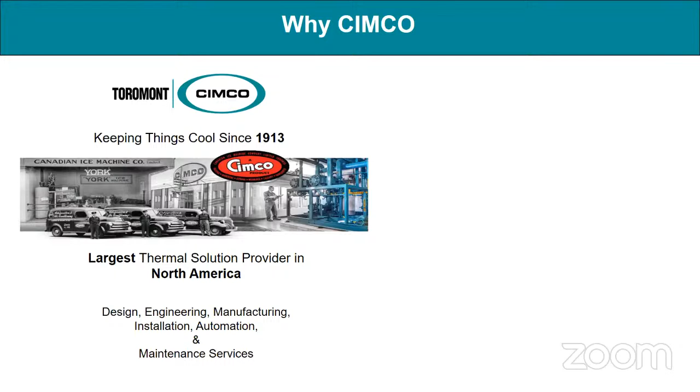So just a quick brief intro on CIMCO. We've actually been around since 1913 as the Canadian Ice Machine Company. So we know a thing or two about making things cool. And we are the largest thermal solution provider within North America. So we do design, engineering, manufacturing, installation, automation, as well as maintenance. And this is why in 2019 and 2020, we were actually asked to participate in the Mayor's Megawatt Challenge, which was a cohort project put on by Climate Challenge Network.

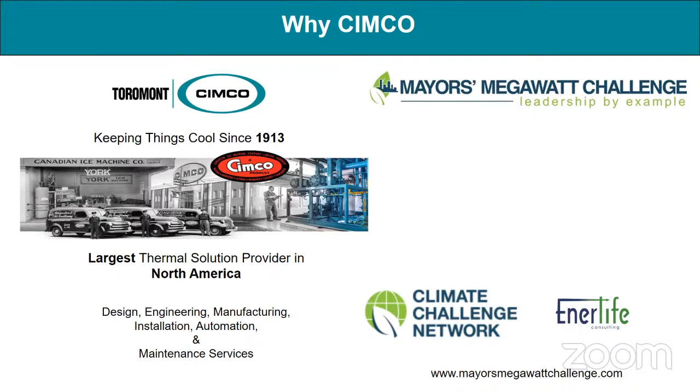And what this cohort project did was it looked at 9 municipal ice rinks and established a feasible pathway for them to lower their GHG emissions, and ultimately gave a high-level business plan that compares business as usual against these low carbon upgrades. So the way that the cohort project and the study was outlined is that we would first establish the emissions baseline. And this is looking at more than just the refrigeration plant. It's looking at the HVAC systems, the insulation, your R value within each building, and then establishing what can actually be done to reduce your GHG footprint, and along the pathway of when it should be done.

So not just an all-in-one solution. We want to look at what actually makes sense based on the end of life for a lot of these pieces of equipment. And then showing the financial analysis. So there's 3 financial analyses, and it would be business as usual, keeping things status quo, versus our low carbon measures, meeting the reduction targets that the government of Canada has put on, which is 50% GHG reduction by 2030 and an 80% GHG reduction by 2050. And then also, if we wanted to escalate this timeline, what could we do to meet that 80% reduction within 5 years? So we're actually preparing 3 business plans for each individual facility.

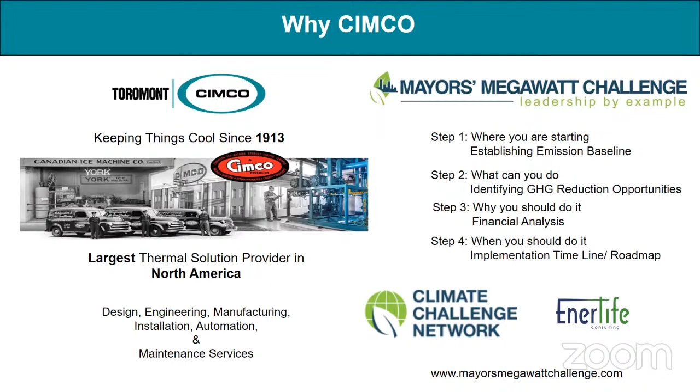And the reason that we are involved in this is because when it comes to a municipal breakdown, arenas and ice plants make up a large portion of the natural gas that is consumed along with the electricity. This here is just arenas in general, but we also know that multi-purpose buildings can most likely include an arena. So we know that they do take a big chunk of this pie, more or less.

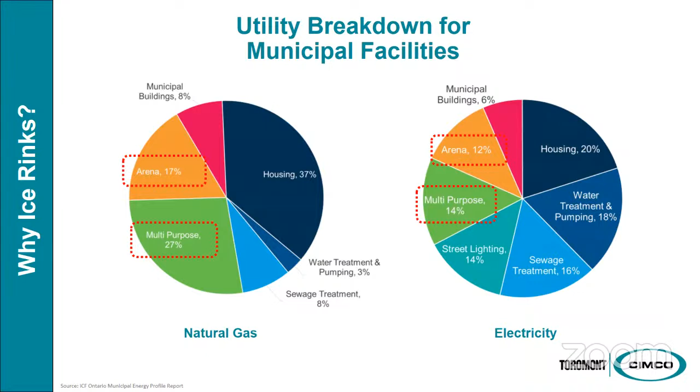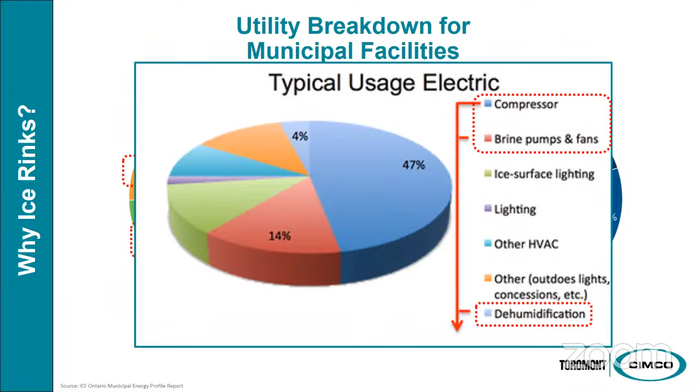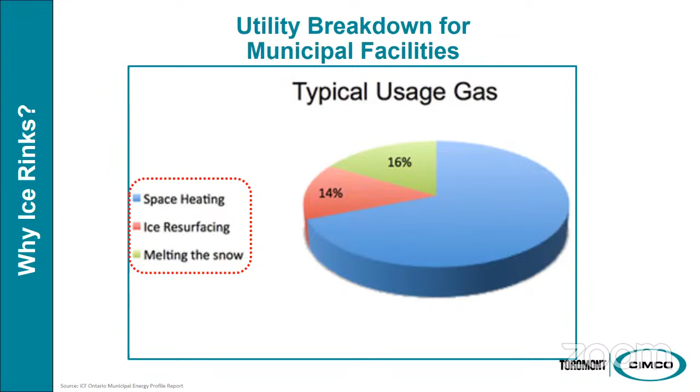And then if we break it down even further, most of the electrical usage within an arena goes to removing heat. We're running those compressors, we're running those brine pumps, we're running dehumidification, and all of that, in order to actually function, requires electricity. At the same time, while we're removing heat, we're also creating heat through a completely different system within that building. And typically we are using natural gas in order to actually create that heat. And a majority of natural gas usage within a municipal breakdown goes all towards the refrigeration plant and keeping people being able to actually use the facility.

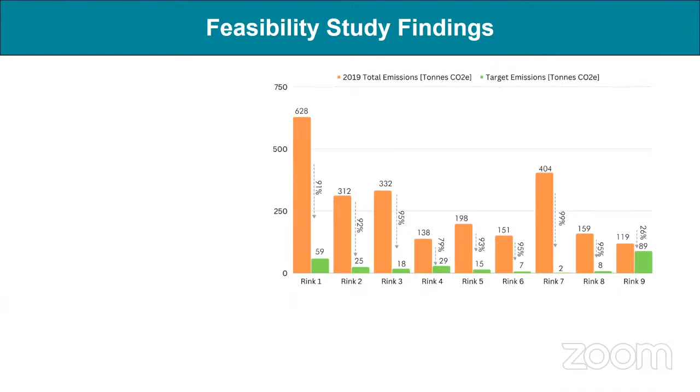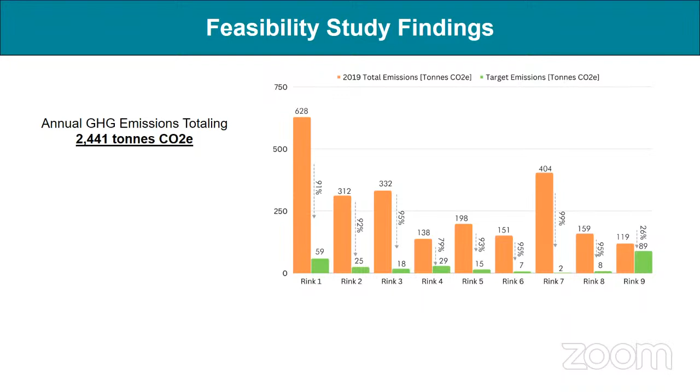So if we look at, these are the 9 rinks that were in the cohort project. So I'm just going to focus kind of overly on the results of this. Combined, these 9 arenas will have an annual GHG emissions totaling 2,441 tons of CO2 equivalent annually. By following the GHG reduction pathway that was outlined, we can actually get that down to 252 tons, which is a significant difference. On average, it was about an 88% reduction in GHG emissions.

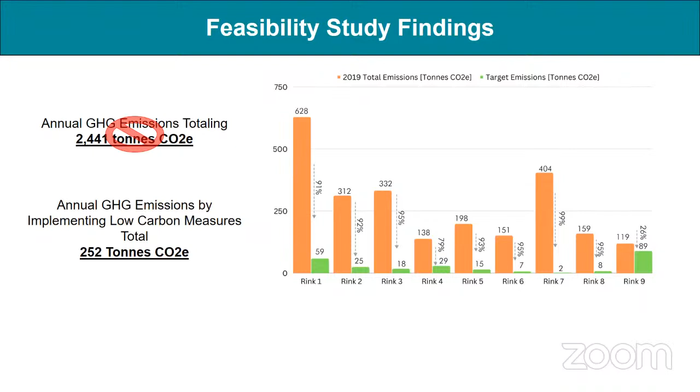The nice thing with that, though, is because we're looking at how we can offset, say, natural gas with electrification, we actually, on average, had a 35% reduction in utility costs. So annually, by following these plans, these 9 arenas will have a combined savings of over $1.3 million a year. When it comes to Canada alone, we have the largest number of arenas globally. I think we've got about 3,500 just arenas across Canada, and we're Canadian, so it's definitely a great place to start when we're talking about lowering our GHG emissions.

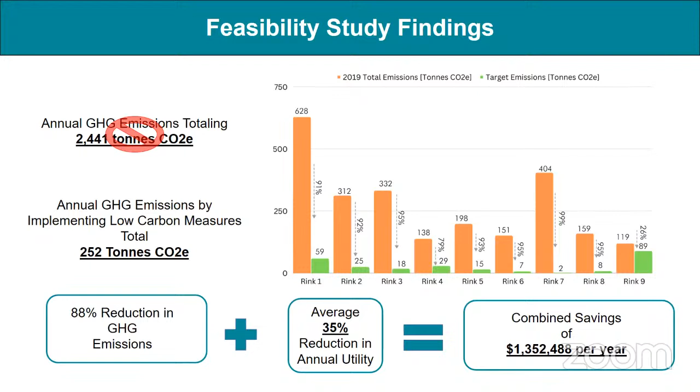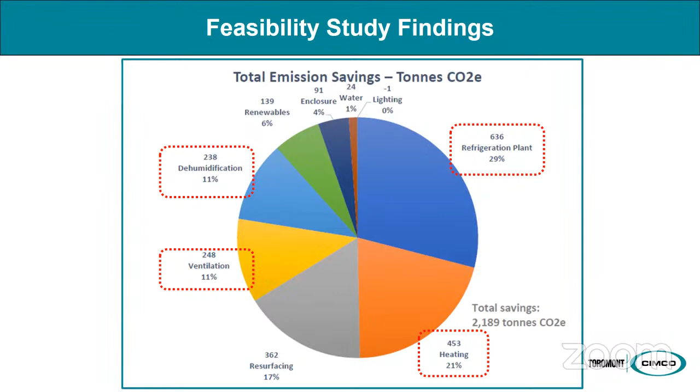Most of the emission savings comes from that refrigeration plant as well. We're looking, again, at dehumidification, ventilation, heating, and then making cold. The studies look at the 3 pillars that are needed to achieve net zero, and it's all going to be specified for your specific location. What actually makes sense for you guys? So starting with optimizing energy consumption, we also want to look at harnessing green power. And then one of the pillars that is often overlooked is eliminating refrigerant emissions.

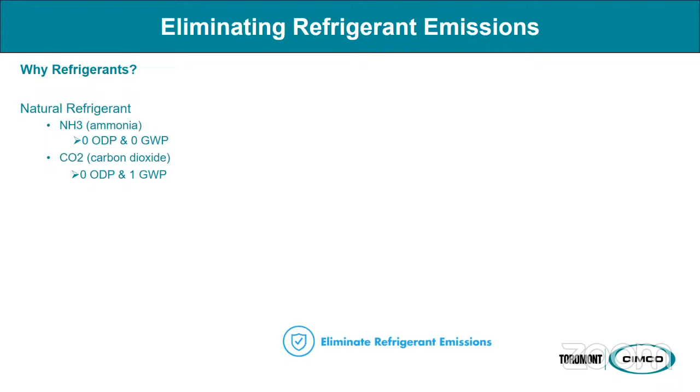So when we're talking about refrigerant emissions, and this is again why CIMCO has made commitments regarding synthetic refrigerants. We have 2 different types of refrigerants. We have natural refrigerants, which would be like CO2 or ammonia. And these are just chemical compounds that are found naturally within the universe. Ammonia has a 0 ODP, so that's ozone depletion potential, and 0 GWP, which is global warming potential. Whereas CO2 has 0 ODP and then a 1 global warming potential. So CO2 is essentially the baseline that we would compare all other refrigerants to. 1 pound of CO2 is equivalent to 1 pound of CO2 being released into the environment.

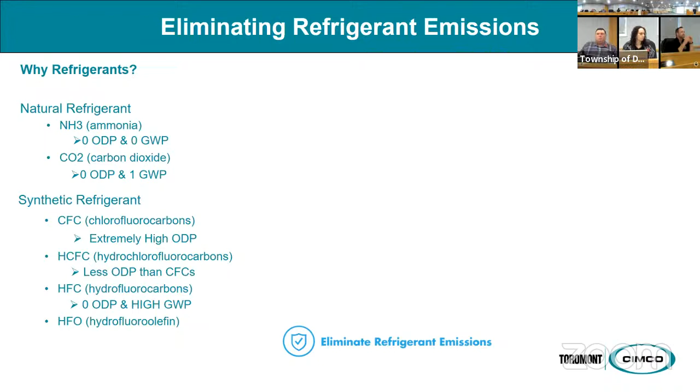Whereas when you're looking at synthetic refrigerants, there has been a big history when it comes to different types of synthetic CFCs, HCFCs, HFCs, and then HFOs. And these will vary depending on the type of chemical that's involved. So they're either going to have extremely high ODPs, which were then phased out through the Montreal Protocol, to newer HFCs and HFOs, which have either zero ODP and a high GWP, or they will have a lower GWP. Greenpeace actually equates about 10% of global warming to these synthetic refrigerant emissions, and it just releases and leaks into the atmosphere.

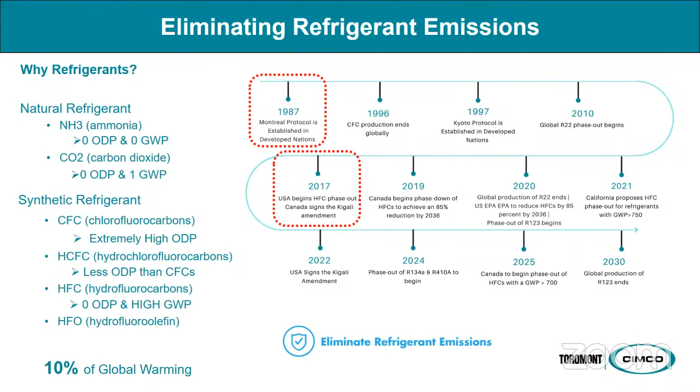This is why in 1987, developed nations across the globe signed the Montreal Protocol, which focused on ozone depletion potential. And then we also signed the Kigali Amendment in 2017, which furthers the phase down and looks at the actual GWP. So we just had a phase out of R22, which was a pretty standardly used refrigerant, especially in arenas. As of 2020, it's no longer being produced. On January 1st, 2024, we're going to our next phase out, which is any refrigerant for this sort of application over 750 GWP. And by 2036, I think we're expected to have about an 85% phase down of refrigerants. So we know that we want to make sure we're future-proofing anything that we're doing by going with a refrigerant that is not running the risk of actually being phased out due to these harmful chemicals.

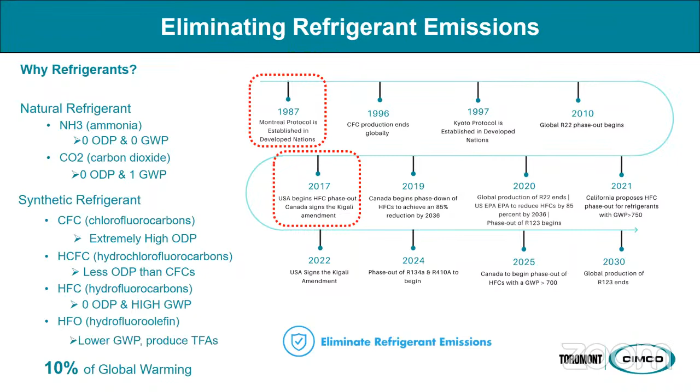This is just a little quick overview of the refrigerant phase-outs. I don't need to go into that. On top of the refrigerant phase-outs, with synthetic refrigerants, the cost, especially when it comes to manufacturing, as they become harder and harder to acquire, continues to go up. Whereas we can see natural refrigerants have actually stayed relatively the same.

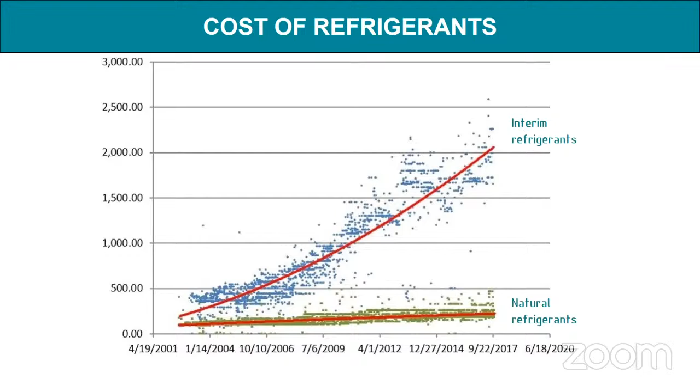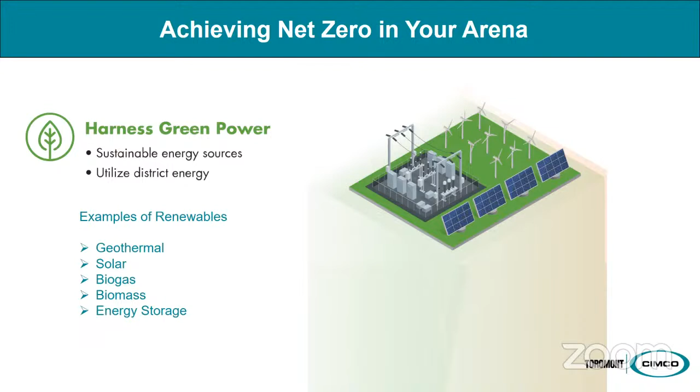So the second pillar would be harnessing green power. And like I said, this is something where we want to make sure that it makes sense for your location. In some locations, geothermal is an actual resource that we should look into, whereas in other locations it doesn't actually make sense, whether it's the water table or just logistically. But then we can look at solar PV. What can we do to your buildings that would help offset electrical consumption? Because at the end of the day, the sun is never going to increase their electrical rates.

While renewables are great, especially when it comes to utility costs, for these arenas they actually only equaled about 6% of the total GHG savings. And that is where there's a big disconnect, which I'll get into a little bit later, between energy efficiency versus actual GHG reduction.

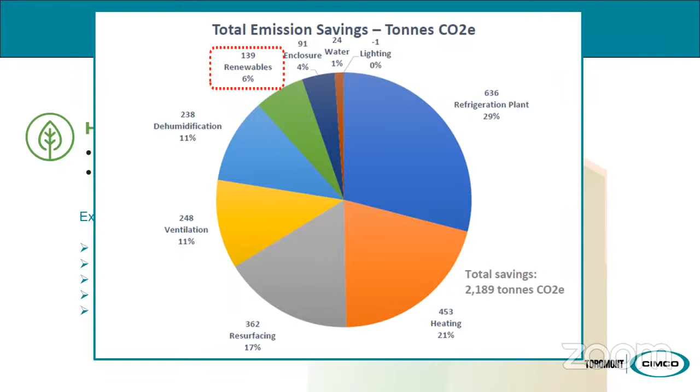Then we also want to look at optimizing energy consumption. That would look at lighting, switching to LED lights, building enclosures, what sort of R-value is your ceiling. Could we put in low-E ceilings? How much would that save you when it comes to efficiency and insulation in your building? Your windows, are they single pane right now? Can we look at going to triple pane when you're replacing them? So it is all encompassing. It is not just the refrigeration and HVAC systems.

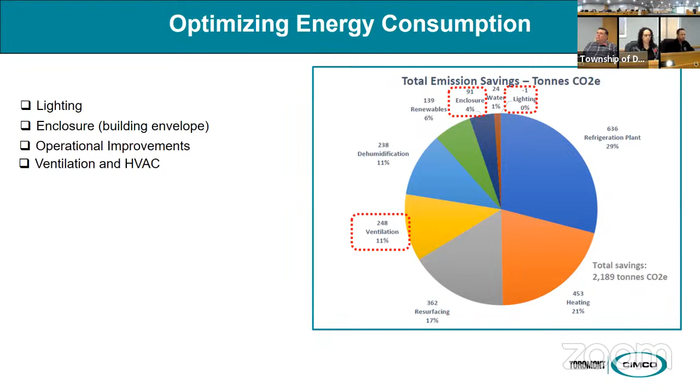Then we obviously want to look at operational improvements. So specifically with ice rinks, what ice thickness are we keeping? Can we decrease that ice thickness so our plant doesn't have to work as hard? What is our dehumidification set at? Different things that are easy, low-hanging fruit when it comes to increasing your efficiency, including HVAC and ventilation.

Dehumidification does play a big role. A lot of facilities will have gas-powered dehumidification. That in itself is going to have a high carbon footprint. It's also going to cost more, but there are desiccant equivalents that we can look into as well, and making sure that we have the proper humidity levels within our facilities, so we don't have an increase in ice built up on your equipment, which increases how hard your system has to work.

Obviously looking at energy efficient equipment and technologies like VFDs, and then putting it all together into control systems. How can we make our system work smarter and not harder, having those setbacks? If we don't have anyone scheduled to use the ice, then why are we maintaining the ice at the normal temperature? We can allow our system to warm off and not work as hard. And then 2 hours before we actually have something on the schedule, that's when we have our system go in and make sure that ice is at the optimal temperature.

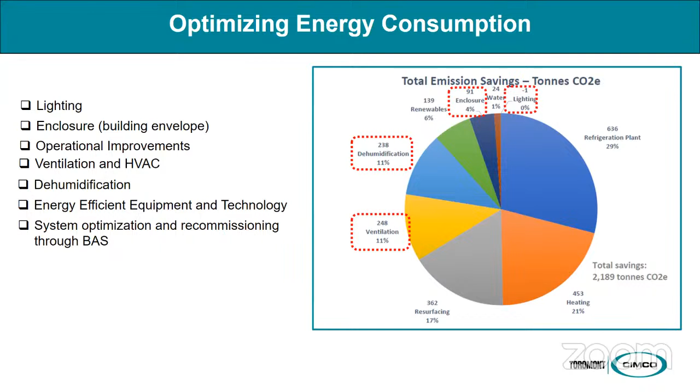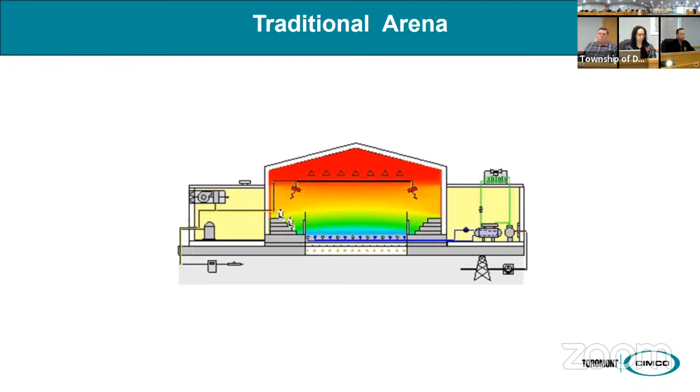Then one of the biggest things to look into is heat recovery and de-superheaters or heat pumps. This is what really attracted me to this job, because before I got into this industry, I never really knew or cared how ice was made, and most people don't necessarily have that understanding either. Or it's just, oh, it's a cold building, and that's why there's ice on the floor. But when you're actually looking at a traditional arena, like I said, we are removing heat from the floor. So there's no such thing as cold. Cold is just the absence of heat.

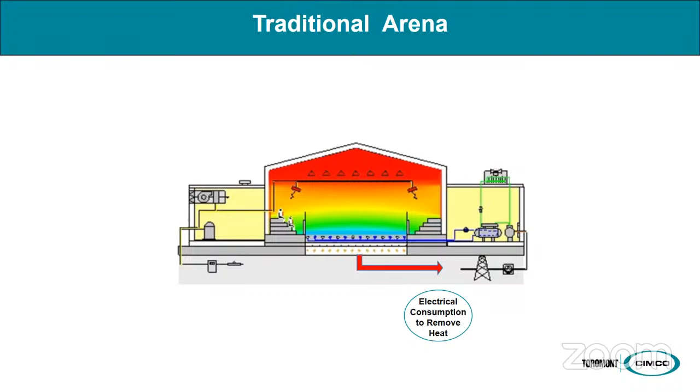A refrigeration plant is actually going to be more efficient than your most efficient HVAC system out there. To put it in simplistic terms, for every 1 kilowatt of energy it takes to remove heat from that ice surface floor, the waste byproduct is equivalent to about 4 kilowatts of heat. So we have a 1-to-4 ratio when it comes to our efficiency. So 400% more efficient at creating heat than it is at making cold. And then typically we're just releasing that into the atmosphere through our condenser.

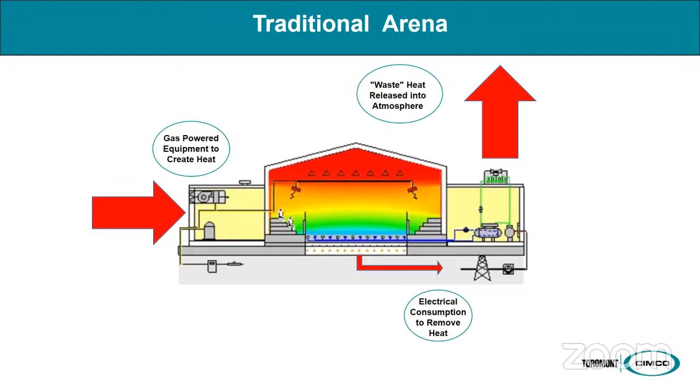At the exact same time, we are using gas-powered equipment to create heat in order to provide space heating and comfort heating, to heat the water for the ice resurfacer, and if you have a snowmelt pit, we're generating heat in order to put it back into the building. So we have 2 different systems that are essentially doing the same thing, just in reverse, working against each other. So by taking the waste heat, we can offset our natural gas consumption significantly.

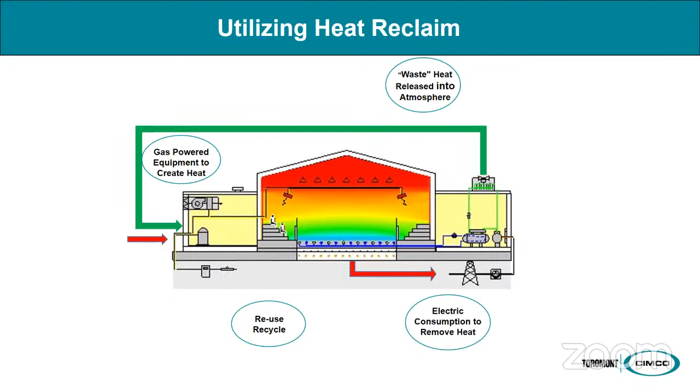And how this would look, we're looking at one specific rink. So this was rink 1 in the cohort project, and this was a bit of a larger facility. Their baseline was established to be at 628 tons of CO2 emissions annually. Of that, gas emissions made up 542 tons. Your electric emissions only made up 85.9.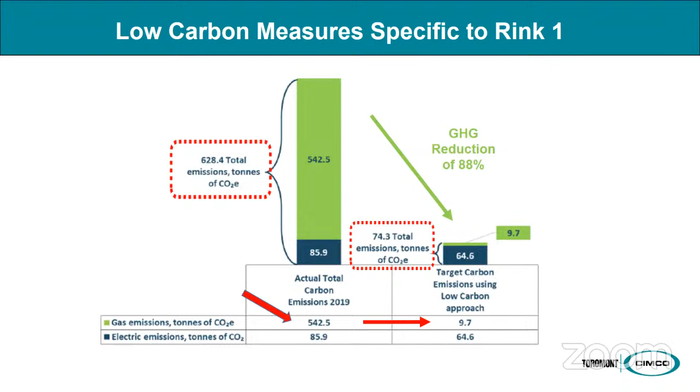By implementing the low carbon upgrades that were identified, we can get them down 88%, down to 74.3 tons of CO2. And pretty well all of that comes from reducing our gas emissions by looking at how we can offset that natural gas. You can see here the electrical emissions only went from 85.9 down to 64.6.

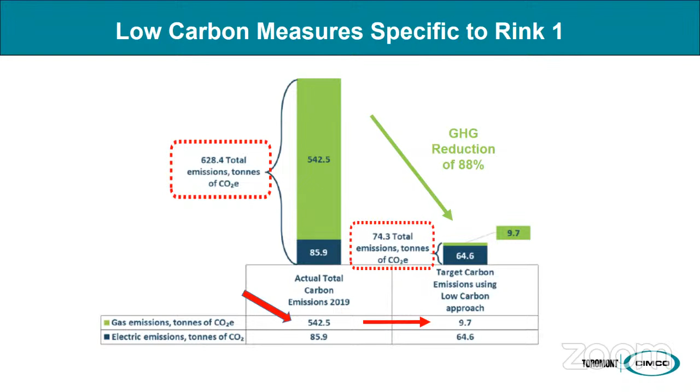And this is a big thing to consider when you're looking at these studies, is we don't want to just look at energy efficiency. We can only get so far by making things more efficient. We actually have to zoom out and see how we can make our facility and the systems that are involved in this facility run in unison, have that synergy between them.

And this is where it gets fun, especially with the financial analysis. So with rink 1, all of the initial outlays of costs, it's projected to cost them about $4.4 million to incorporate all of the GHG reduction opportunity. Because of the offset and the utility savings, they're expected to save over $200,000 a year in utilities, which then gives us the net present value, which is really important, especially when we're talking to the community and providing that justification for why we would like to invest in these low carbon opportunities.

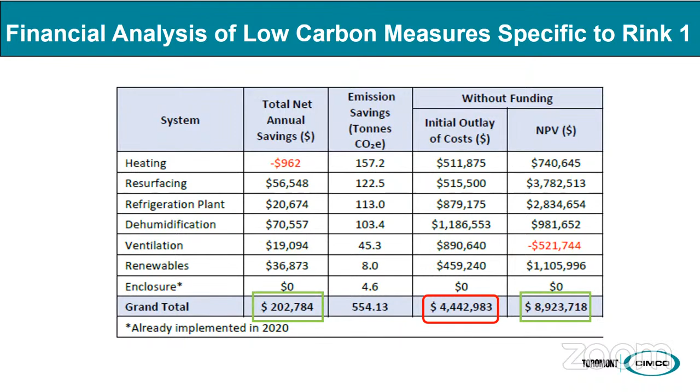We want to look at the entire life cycle costing. How much does this system actually cost us at the end of its life, and not just looking at those base numbers? So at the end of this 35-year period here, they're expected to have this facility now be in the positives for net present value at almost $9 million. Whereas if you compare that, actually, I'm skipping ahead.

Sorry, I'm stopping for a second. There's an echo on my end, which is fine, but I just want to make sure everyone can hear me okay on your end. I think we're okay. I hear a little bit of an echo also, but certainly on Zoom it's okay. Madam Clerk, is it okay in the chambers? Yeah, it's actually quite clear. There's no echo for us. Sometimes we do lose a word or two of what you're saying there, Jordan. Okay. Well, if any questions, just let me know along the way. Thank you for letting me know. So yes, we have...

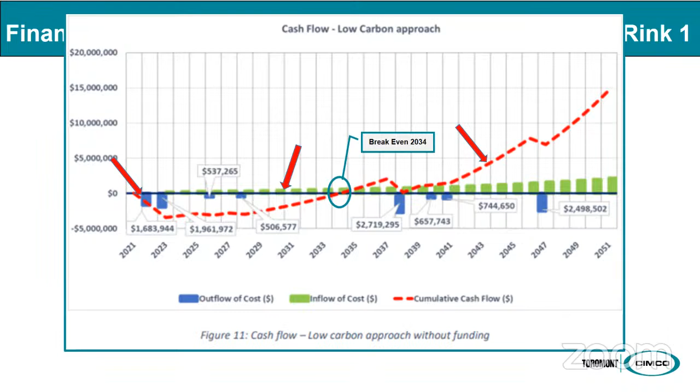Sorry, just one very quick question, if I may, through Mayor Watson. What discount rate was used on the NPV calculations? The discount rate, I have a number in my mind, but I don't want to be wrong. So I'll get back to you on that, but we are using a discount rate. Okay, thank you.

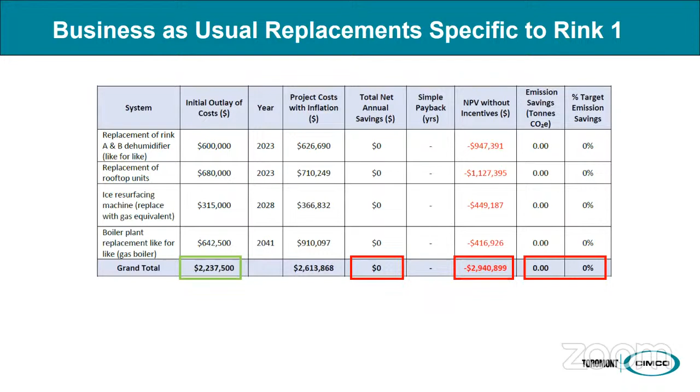So then when we compare it to the business as usual, this is just the cost to actually keep this plant operational and safe. At the end of the day, no matter what, they're going to be spending roughly $2.2 million on the like-for-like replacements. Because they're like-for-like, we don't expect any utility savings or GHG savings, but that system is still costing us money to run. So at the end of its life cycle, we actually have a negative net present value of almost $3 million. And this is the same cash flow graph, where you're just showing again those purchases out and then how much it actually costs to operate the facility or the utilities.

The other thing to keep in mind too is the increase in carbon tax. In Ontario, we pay very little in carbon tax on our electricity, and it's built into our rate, whereas we have the addition of the carbon tax on natural gas. With that, we sent out a survey to see what a typical very small single pad arena consumption would be. And on average, it's about 39,000 cubic meters annually. If this facility is maintaining that consumption, in 2022 they would have paid about $3,900 in carbon tax, just on that consumption.

If they don't do anything and keep that same consumption, by 2040, they'll be paying just over $22,000. And I know that there's different discussions regarding the carbon tax right now, but the idea behind the carbon tax is to help continue to fund the green projects and the grants that are coming out. So the way that I like to put it is, you can start to make some changes now and pay less in carbon tax, or continue doing the same thing and help other communities lower their GHG emissions through the grant opportunities that are out there.

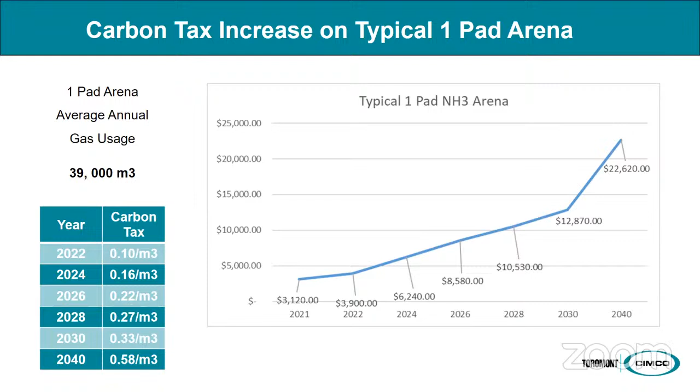So then it's all fine and dandy when we're talking about making these changes, but what funding is available right now? I know that one of the hardest things is providing that justification, especially when it comes to those capital projects, and that is where the feasibility study can give you that bridge by providing

Excuse me, Jordan, I'm just going to pause you for one moment. Madam Clerk, did I see your hand up? Were you trying to signal us? The deputy mayor has a question, I believe. Oh, okay. Yes. Would it be better perhaps to hold questions to the end of the presentation? Is that okay? Sorry, Councillor Vervoort kind of jumped in and surprised me. I didn't see him pop in. So, but if that's okay, Deputy Mayor? Okay, great. Thanks. Sorry about that. Jordan, carry on.

So when it comes to actually applying for grants, or even to just provide that justification when you're talking to people like yourself on council, we don't want to focus on just that initial number. We actually want to look at the big long-term picture. So some of the grants that are available right now, and there are specific ones in different provinces. These I'm just looking at federally.

I'm not sure if anyone on the council attempted to apply for the GICB grant that finished at the end of February. But it was an amazing grant that had the opportunity to actually cover up to 80% of some of these projects if you had the information and the plan in order to have a very strong application, because it was an incredibly competitive grant. That study would give you what you would need to actually apply for grants like the GICB, including RETScreen software. So we would run a RETScreen analysis on any of the measures, and RETScreen analysis is required by most federal grants.

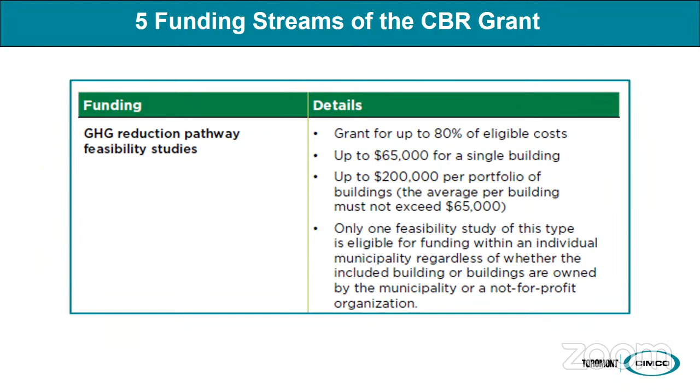So the grant cycle, they have improved this quite a bit. The full grant application for the feasibility study takes about 6 months now, which is down from about a year, which is great. And that's from the pre-application to the full application. The study itself is going to take anywhere from about 2 to 3 months. And then from there, once the full report is submitted, you would present that to the FCM, they would review it, and then they would actually give that final reimbursement.

So with this grant, we can request 70% of that 80 upfront. So then that will help with the capital budgeting for these feasibility studies. And then that remaining 30% would be after you've submitted the docket or the package for the feasibility studies, and then you would get that final distribution.

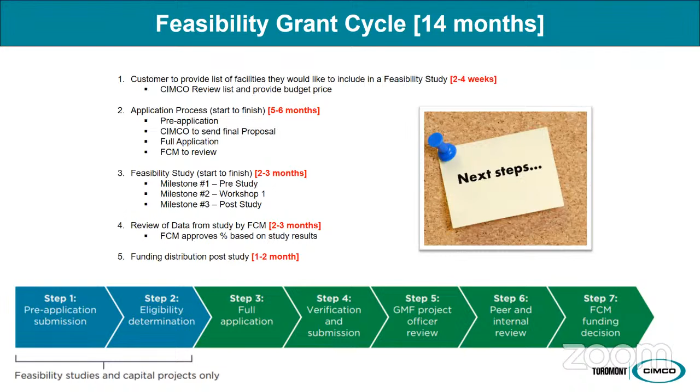Just some simple projects that we've done, just to kind of highlight some stuff. So the BMO Center in Halifax, this is actually one of the first Eco-Chill with full heat reclaim projects. I shouldn't say first, but it's been around for a little bit. And this facility is actually recognized as a leader in efficiency and sustainability by the FCM. And by using heat reclaim through their CIMCO Eco-Chill, they're saving $100,000 per year in utility costs.

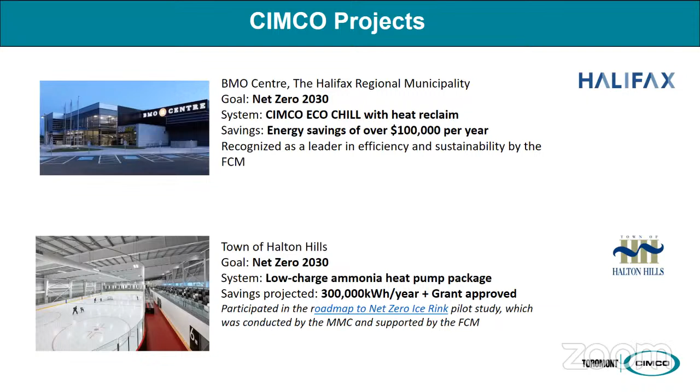The town of Halton Hills is actually working on one of the projects, so they were one of the rinks within the Mayor's Megawatt, and they successfully applied for grants to do one of the measures that was identified, which is a low charge ammonia heat pump. And so we're in the works of putting that in right now.

Another thing to just think about while we're talking is we are obviously facing a housing crisis as well, which is very exciting. I shouldn't say it's exciting, but it's exciting when it comes to the possibilities. Two birds, one stone. We have also worked on some projects. So North Vancouver, they have an outside arena, and instead of actually releasing that heat into the environment, we tapped into the district energy system that is providing heating and cooling to the surrounding businesses, and we are providing them with waste heat, which is offsetting the natural gas used within the normal energy system.

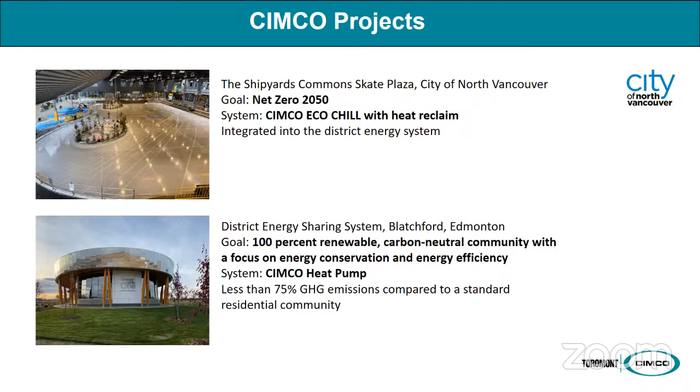And so they're using a refrigeration system to provide heating and cooling. Right now they're at 75% less GHG emissions compared to a normal residential community, but their goal by the end of the project is to actually get to 100%. And the way that they're doing it is they developed their own energy corporation, and so they're selling that heating and cooling to those residential buildings, which is just a really neat project to be involved in. So that's the end of my presentation there. So we can go to questions.

Great, thank you very much for that. Deputy Mayor, I saw you've got a question, but before we do that, I've got a little bit of housekeeping. I got ahead of myself on the agenda. We actually hadn't done the disclosure of pecuniary interest call. So I'll put that out there before we start any discussion and questions. Are there any disclosures of pecuniary interest? Seeing nothing, we also need an adoption of the agenda. Could I get a motion for the adoption of the agenda, please? Councillor Watt, and seconded by Councillor Johnston. All in favor? And that motion carries. And now back officially to the delegation and Deputy Mayor Nelson, your question.

Yes, thank you, through Madam Mayor. Thanks a lot for your presentation, Jordan. I guess the biggest issue that jumps out at me is none of our facilities are natural gas. All of our facilities are all electric, and I don't know about propane, but no natural gas. So I just wonder, is that included in all of these reductions, or looking at propane instead of natural gas? And also electric, I guess. Whatever fuel type you're using is what we would look at. It's just that natural gas is more commonly used, but 100% we would look at offsetting propane as well. All right, that was my question.